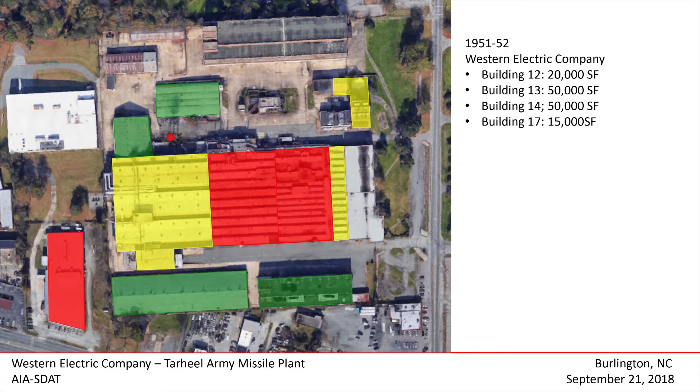And in 1959, they built out yet more. They built another building over here. They built Nike 2, which is the really tallest building on the site here - it's 100,000 square feet by itself, a really, really big building. And that sort of started to build the site out. And then eventually, over time, more of the shots here - here's actually some of the Nike missile gear that was made here.

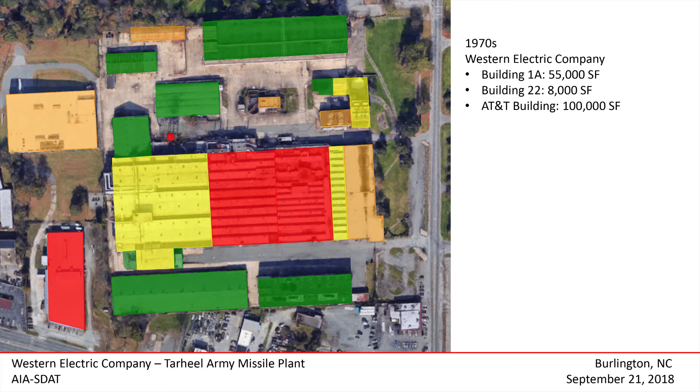By the 1970s, they built some more spaces here. Western Electric started building not just missile parts, but speakerphone pieces, things like that. And in the early 1980s, they built this big block over here.

Here's what we have today. Here's the site, colored out here. But you see, for as much square footage there is, there's lots of open space in between. That's really great to see, because if a factory site is packed too tight, there's not enough breathing room, not enough room to circulate, and not really opportunities to get daylight into the spaces. This is a really nice, modest scale to the site here.

One of the things we were all taken by is when you actually walk into the large plaza areas, the scale still has very much a human scale to it, despite being hundreds of thousands of square feet of space. It doesn't feel too overwhelming. So we think there's a lot of great opportunities to make a really great place to come and visit here.

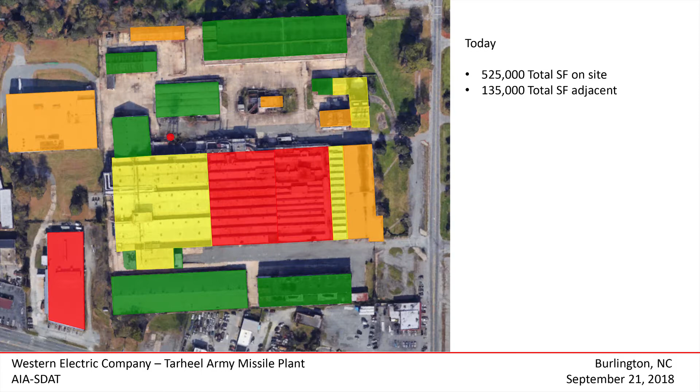So one of the things, this is a sustainable design assessment team. We want to talk about sustainable design. It's one of the core principles about why we're here. However, I'm going to cover this really quickly, because in the end it's something we would do on this project no matter what, but it's not that important to how we're going to redevelop the site.

One of the things to consider to begin with is the recycling of an old building is inherently sustainable, inherently green. Carl Elefante, who's actually the current president of AIA, was quoted years ago as saying the greenest building is one that's already been built. And that's absolutely true.

Both because they're already integrated in the community, but also the idea of avoided impact. It's not just the fact that we've already expended the energy to build the buildings there, but by reclaiming that building once it's been abandoned, you're avoiding the additional environmental impact of building a new building if you can find a new purpose to fit in the old one.

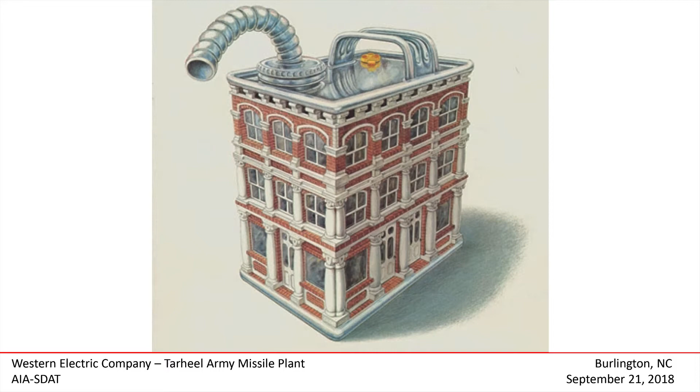We'll do things like solar panels on the roof - it's important and sustainable, done all the time now. We could also do something sassier with a solar canopy in the parking areas, something a little artful there. Let's challenge ourselves to do something really cool with solar and make an art piece out of it - all uses of solar energy, but imagine walking down one of those open areas and having this really cool interactive environment.

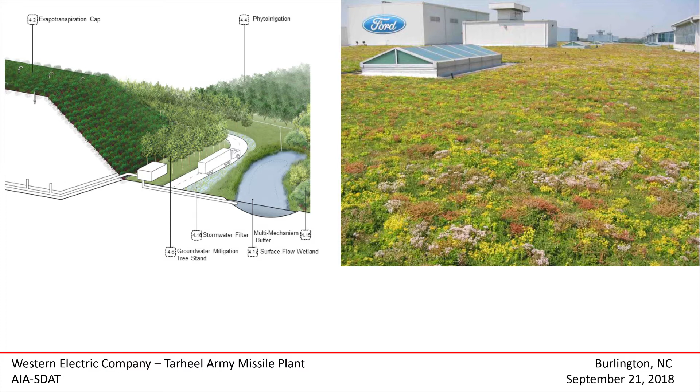Same thing with green roofs - we do them all the time. It's the best way to achieve stormwater compliance, provides some insulative value, and reduces urban heat island effect. The roofs here can support that. In addition, let's talk about phytoremediation - Chris talked a little about that - actually using plantings on the site to help heal the environmental contamination. Let's think a little bigger here than just merely making it greener.

Same thing with water reclamation, a big thing about sustainability. We could put some nice new big shiny galvanized tanks on the site, capture the rainwater, use it to irrigate - a thing you would do no matter what. But on top of that, we've got a really big tank on site anyway, so maybe we could activate the existing water tower, pump water up there and use that to irrigate, providing function back to the pre-existing structure. It's also a great signage opportunity when we renovate the site to have that labeled and branded.

We work hard these days to design new buildings for natural ventilation and daylighting strategies. This is already here. All I have to do is undo all the renovations from the 50s, 60s, the 70s, and open the building back up to be designed to act the way it originally was designed to act.

So getting to the interesting part of it, there's three aspects of sustainability. There's environmental sustainability, reducing the impact of the built environment and our buildings on the natural world. There's economic sustainability, designing in a way that reduces the cost to operate a building so you can afford to operate it. Those are two easily understood things to consider. Social sustainability is the third part that's really important.

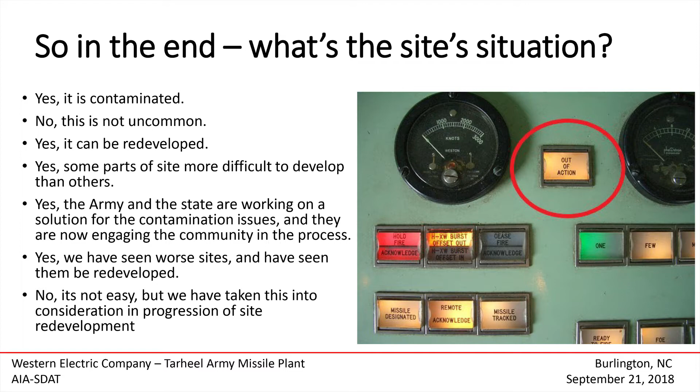The Army and state are working on a solution for the contamination issues. The responsible party for the majority of contamination at the site is the U.S. Army, and they are working with the state remediation program manager to come up with a plan on the ongoing cleanup. When I say ongoing, I'll explain where it has been in the last few years on that topic too.

Certainly, I've seen worse sites than this—you might think, oh what? But no, really, I have. And certainly it's not going to be easy, but we've taken these considerations into account as we've all worked together over the last several days, coming up with a staged plan on how to approach dealing with a big property like this.

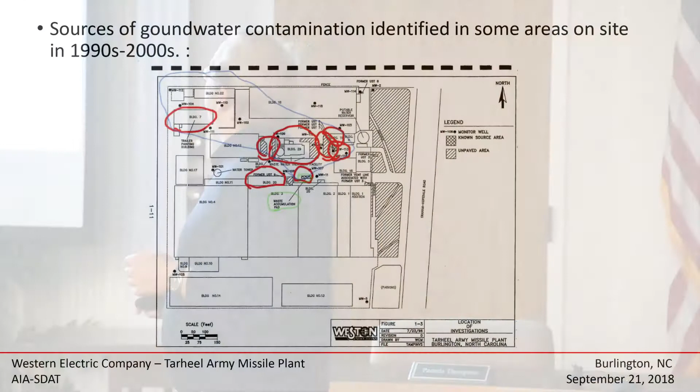Next, briefly, I want to point out from the documentation—and there is quite a bit of it. I was looking through documents for the last few days, and at one point I thought I'd gotten to the bottom of what I needed to download. There's a trove. Then I realized, I looked at Peter and said, Peter, I don't think I'm going to get all these downloaded. He had nice, pretty fast internet set up for us, and I still didn't think I'd get there. So from that point, I picked and chose what I was actually going to try to digest to talk to you guys this evening.

The red areas are the areas of known impact and source areas. The date on the document down there says like '94, but it was updated through—I think this was a 2004 document, somewhere around in there.

But those areas, and you see the blue, that's really bad. Chris is not graphically inclined.

So I tried to draw in there a little bit of where the plume kind of goes to the northwest direction. That is a very basic summary of where the hot spots were. They've done significant cleanup over the years, but there is still a plume in the groundwater going that way. A plume is just contamination that has gotten into the groundwater and moves along.

Can you give us perspective as to what roads are where? Sure, it's kind of hard. Yeah, it's not the best, and it's also kind of squished. The screen squishes it a little bit. So that's north up there.

And as we look at the site, that's kind of the old entrance. So yeah, to the northwest there's a street just north of the property and residential homes on that side, and we'll talk about that in just a second.

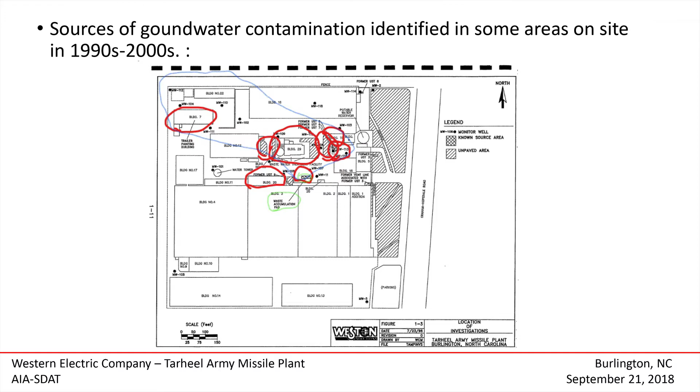So as we go through this trove of information, in 1988 the reports kind of claimed there's no off-site contamination presumed, and no reason to worry about it. The record indicates also a desire to end investigation in the 90s. I presume that means to not prevent redevelopment. They really wanted to see the site redeveloped 20-something, 30 years ago, right?

Interesting, as they'd even added in the record, it shows that people had tried to discourage further environmental review of the site. Where I'm going is they're still working on cleanup now, 30-something years later. Why is that? There were certain forces saying, oh it's good, it's fine, don't worry about it.

Well, in the brownfield world, you have to deal with your issues so you can get to the point of ready finance and being able to do the great things that we want to do. So when you look at that, it even stays in there: somebody, a representative at one time in the 90s was saying, oh, we need to quit doing this environmental investigation. It's like, quote unquote, fighting windmills. Well, if we had fought those windmills, we might have a site redeveloped now.

So just saying. All right, next we move on to the now time, getting closer to now. This was in the 2000s. This is part of the remediation process on site. I found some pictures of the actual remediation taking place, and it shows the three different types.

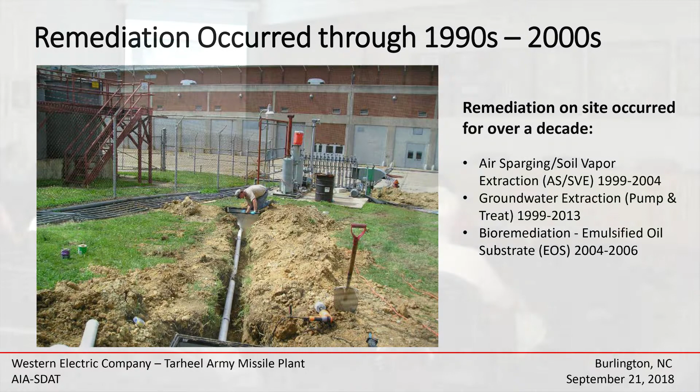One type they even tried in 2004 to 2006 was bioremediation. They were saying, hey, let's try a pilot, let's see if we can do this through the Army. They used emulsified oil, soybean oil, to see how that worked. It didn't quite work out as well as they hoped, but it did work.

It broke down the products, but they broke down into even worse and more carcinogenic daughter products. So then they put more in there to get rid of those. But that process continues to work as it always does. So it didn't quite work out as well, but they tried.

Significant amounts. These groundwater extraction pump and treat efforts went on from '99 to 2013. That's quite a long time. A significant amount was pumped and treated through that.

Next, I'm just going to show you in terms of the site, these lovely panoramic pictures are cool, but sometimes they distort things. You can kind of see the little red box—that's where an old hazardous waste containment area was. So they would store things there, from everything I've read in the record.

I didn't work at the site, so you may know better, and after this conversation if you do, let me know, because we can pass that along. Every bit of information about this stuff helps the future cleanup, trust me. But there were several areas impacted as source areas, which I showed you in red before. That was the big nasty one, and that's the one they focused on as being the source going to the northwest.

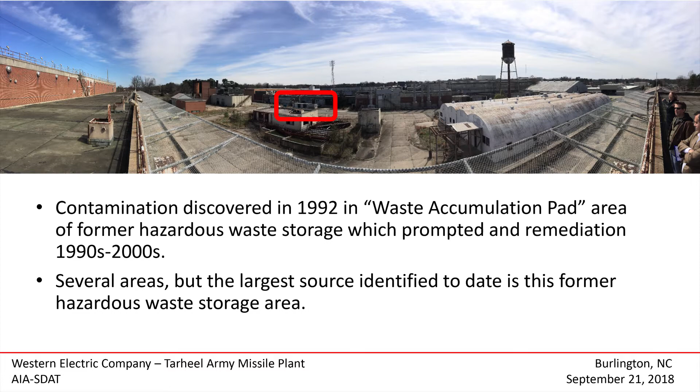Just to provide a little more, these are some snaps. They have sampled in the little creek that runs near the site. They've also sampled on-site—those are some of the locations where they had monitoring wells. So I wanted to just give you a little idea of what was going on.

Most recently, and as the status of now—I want to get to that—in May of 2017, a great acronym, the Agency for Toxic Substances and Disease Registry, the ATSDR, works with the Department of Health and Human Services in North Carolina.

They put together a health consultation, essentially a risk assessment of the impacts at the site and how that may or may not be affecting those off-site. That was based on information in the record, that big giant trove of data. They reviewed it, sent a letter saying we can't say because there's not enough data.

So the Army needs to go get more data. Where I'm going is, if you lived northwest of the site, you may have received a letter recently, in the last month or two, saying they'd like to sample some indoor air vapor intrusion in your house. That is apparently occurring just as I started calling and asking questions to determine the status of the property. This has come to light. So I wanted to run through the status. They are going to seek additional information to find out.

What is vapor intrusion? What is it they're worried about? Essentially, when it goes into the groundwater, volatile organic compounds can travel great distances sometimes, you don't know, and then they can come back up and volatilize into a home. These are typically solvents, volatile organic compounds. The names are big and long, but they're shortened to TCE or PCE. Those are the ones they're concerned with here, and they're generally used as parts cleaner. That's what they used at this site.

I met a gentleman who walked me through the site. It was really valuable information. Great guy, Richard was his name. He showed me the location at the site where they actually used the solvents, and he had personally used them himself, so he was telling me about it. That was a real special treat, to meet him and some others at the meeting the other day.

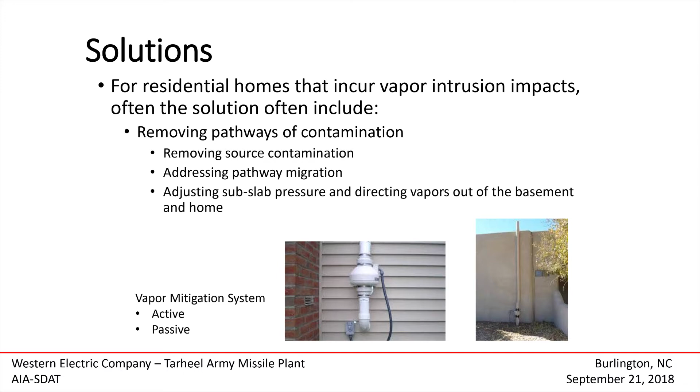If they find those at the houses, is the Army going to pay for them? Typically, yes. I won't speak for the Army, they might shoot me, but in most cases the responsible party does do that, yes. I haven't found one where they didn't.

I just wanted to give a snapshot of what it is. The big key is this concern comes up all the time, all over the country, on brownfield properties I've worked on here and there. It is definitely surmountable, and the data I've seen here is not the type of scary site I've seen in other places.

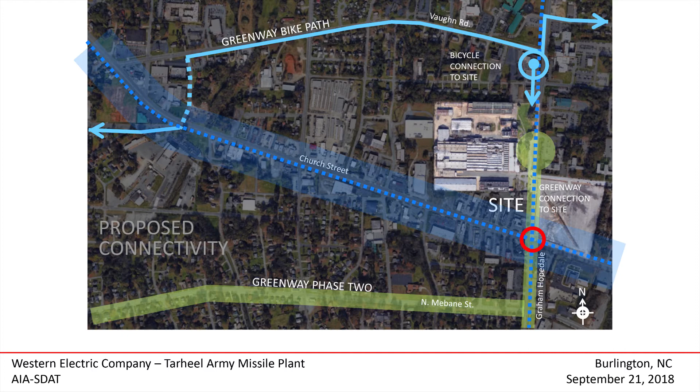And then with some focus soon on the development of the Church Street corridor—a lot of people talked about the corridor really not being the most inviting way to get out to this site. It's all fast food and small businesses. The sidewalks are intermittent and it's really hard to walk. So these connectivity ideas are going to be important in connecting this property to the rest of the community and to downtown, so the other places where you're investing in the community can see some return here also.

So I talked a little bit about this idea of a phased project that happens in pieces. What we wanted to do is say, what's a phase 1 that's doable? How do you keep from being deterred by the idea of 800,000 square feet? Tom has told us many times, you don't need 800,000 square feet of anything, you don't need 750,000 square feet of anything. So how do we look at this complex and start making some really simple decisions that start to utilize the building, utilize the space, change the image of it?

The first thing—the front yard. So we've got this big front yard on this property. It's kind of unkempt right now, but it's a front yard. It's green space.

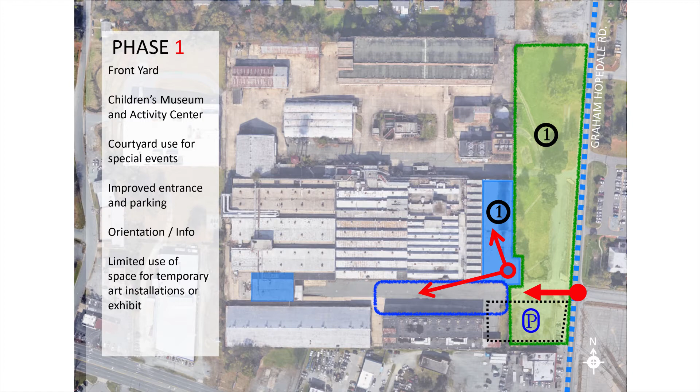Start doing maintenance on it, start keeping that space looking good, and start making it a really positive part of the streetscape in the area. It changes the way people start to think about the potential of the site.

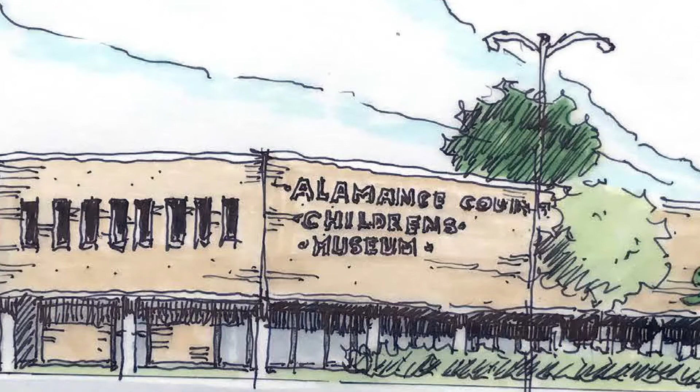Children's Museum and Activity Center. This 1970s piece of building, pretty easy renovation. None of these are set in stone, you could put a medical office there. There are any number of things that fit the needs we've talked about that could go in this location.

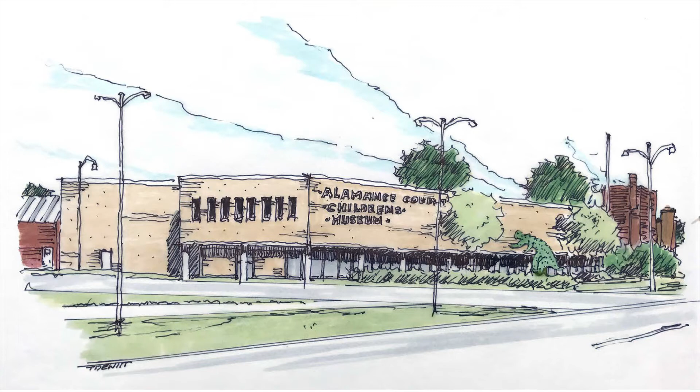But to start bringing activity to the site, bringing families, a place to start going and having those activities. This courtyard where we met the other day could very easily be cleaned up and turned into an event space that can be managed and controlled when you need to, with small concerts or a big movie screen for outdoor movies in the summertime.

By reworking the existing parking and the entry here, you really can create good access to this. You've controlled a portion of the site, and you haven't had to deal with all of the mess that's behind it right away. So you can really get started with this.

When you go down Graham Hopedale Road and look at this property, it can look like a fully renovated and restored property pretty quickly by doing some of these first steps. So phase 2, this image shows the prominence of that front building. As a children's museum, as a new clinic, it starts to really project the potential of development here.

Phase 2 extends that idea with the development of a health and wellness clinic area. We're not programming this right now, but as a focus for development, it's an opportunity to partner with other healthcare entities in the region and the community to help make this project happen.

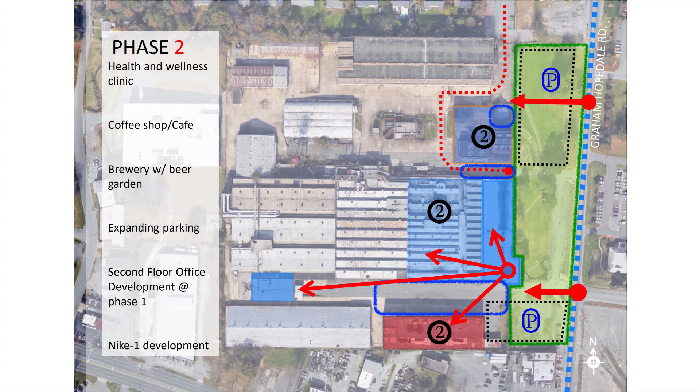Over here, I have to say this is a little bit of a favorite - I do own a brewery also, and brew beer. So we've got this cool building sitting over there that's also part of the front of the property, the old boiler plant, or the power plant.

There are plenty of examples of where those have been turned into breweries, brew houses, and really cool places to go eat and drink. We've got an opportunity here too to create some parking with public access. And we now have the whole front of the facility, for the most part, cleaned up and occupied and being used.

Now, the red rectangle down here, that's the Nike missile plant number 1 - not missile plant, Nike number 1. Nike number 1 is a pretty good building from a development standpoint, and in a few minutes Dominic's going to talk a little bit about some development scenarios for that building.

It can easily be a standalone development, so it could happen at this time, number 2. And a couple other things there - there's this little building back here, a portion of building at the end of this courtyard.

When everybody took the tour the other day, everybody that walked in there said, wouldn't this be a cool restaurant? It's got a little wall space in there called the Crow's Nest. Well, that could be used right now as a temporary exhibit space - you could do rotating exhibits, receptions in there. It's a small area that's easy to clean up, tidy up, and separate from the rest of the facility, and it's connected to this courtyard where you could do events also.

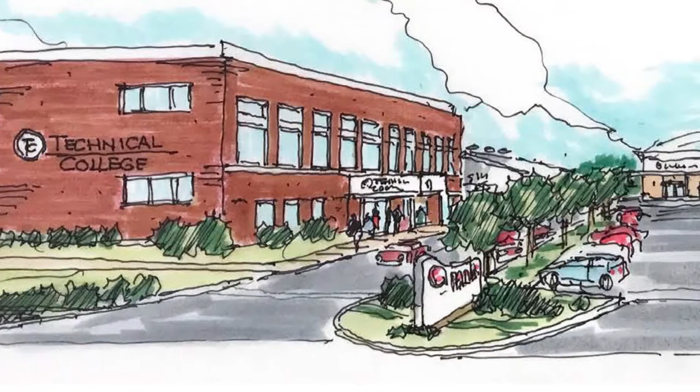So the next phase, phase 3 - well, this is in phase 2, you can see just by cleaning up that courtyard, the entranceway, and the parking, you start to have a pretty inviting space and building here. And again, there's really big challenges we haven't had to deal with yet. So we're moving you through step by step in a way that you can grasp how to turn this whole facility around, but not all at once.

That's the power plant there, so, pretty cool brewery space if you ask me. I'd love to have mine there, but I already have one.

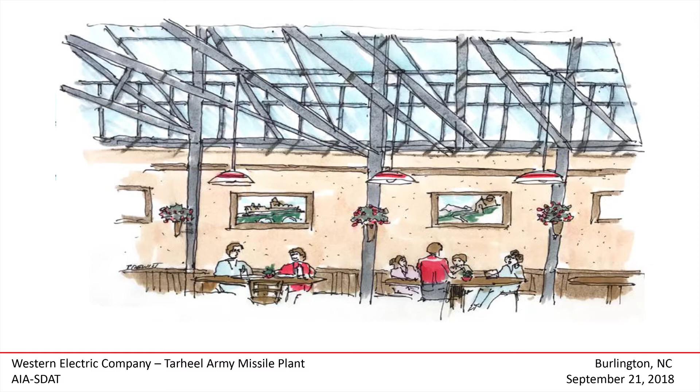Expansion, expansion, yes, we're not franchising.

Phase 3 is where we start to take on some of the big buildings, and we need more infrastructure on site, more circulation, more parking, all those things that go along with increased development and increased occupation, so we've got a lot of people on site.

So the expansion of the health and wellness can include recreation facilities, whether it's indoor soccer fields, tennis courts.

I don't know if you're into pickleball down here. It seems to be what people are talking about back home.

But facilities that can be regional draws as well as local and community assets from a recreational standpoint.

The building here, which is a corrugated metal building that some of you saw the other night, is the perfect size to be indoor parking. You just open it up, drive two drive aisles inside, and you've got parking right there - you didn't have to build a structure.

And that parking can serve this new development and this new development here, while your parking out here is still serving your development along the face of the property here.

We're also looking here at starting to think about having a connection through this building that connects these two open areas that we're calling plazas right now, so down the road we're starting to create a way for you to move around this property and for different areas to be connected internally.

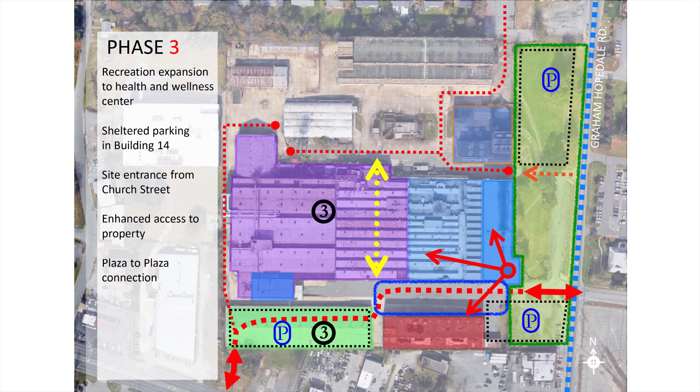There's also an opportunity down here, because we have a piece of property that isn't built, to have a connection directly off of Church Street too. So we're increasing access and varying the access to the property so different functions in different areas don't overlap and have traffic problems on the site.

And you can see these spaces inside these buildings are huge. You can easily fit multiple recreational fields inside these buildings.

So now Phase 4. Phase 4 is really concentrated back in the back of the property. They're these smaller open buildings, the Quonset hut building right here, a little courtyard here, and these kind of open spaces around them. We see Phase 4 really being sort of artist maker space.

It's an area that might need more cleaning up and more remediation in that portion of the site, so we pushed it back in the phasing a little bit to give us time to get there and do the things we need to clear the way so development of those is easy.

This could be a public sort of sculpture court where the artists that have their studios here have their stuff out there. It's open to the public. You can go see what they're working on and watch their process.

So that's Phase 4. Public gallery space could be in the Quonset hut. And at this point, we can start thinking about this large open space over here too, as a large event space. And that's a big space.

You could have a big concert there and put hundreds of people in there. You could have small stage, big stage. It's really pretty flexible right now.

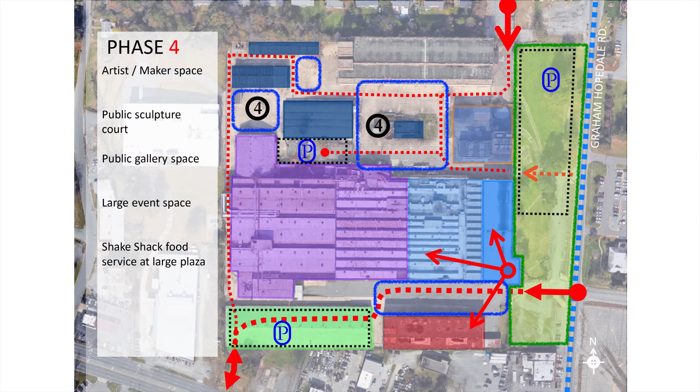And you can see it's got a nice scale to it. This would be your brewery down here on the end, and you'd have a beer garden off of the brewery, and you could walk back out - if an event was going on and you couldn't get into the brewery, just come on back out and get something out here in the plaza.

It's a really kind of wonderful space for that, and these big sort of odd Cold War buildings are a really cool backdrop that give it character that most places don't have.

So Phase 5 then is really the biggest undertaking from a development standpoint, and it's the big Nike 2 building back here. That building can sit there. It's not going anywhere, nothing much is going to happen to it. So if you need 20 years to do the rest of this stuff, it's just going to be waiting for you right there. For development, it's a lot of square footage.

It can be broken up all sorts of different ways. And so, in a way, we don't want to prescribe that it has to be anything right now, because once you get to it, you may have a different idea than you do now about what you'd like to have there. This site might become a destination, and all of a sudden that's really something people are looking at and saying, well, I really want to do that. We've got a university that wants to put a portion of their school there. We've got a lab that wants to go there. So we're not prescribing right now every use for every building. We're giving you some suggestions on how this could work and how you could move this forward.

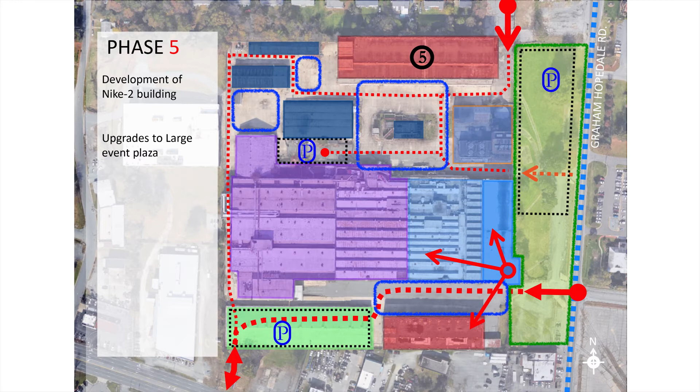You can see really these are the Quonset huts. Everybody loves the Quonset huts. They're there, and you have all these extensions to the plaza all around the Quonset hut. You'd be wandering around the artist studios if there was an event there. So you've really got a wonderful place to be, interacting with a wide range of things.

So we also wanted to take a big picture look here. We've heard some people talk about a range of things. And so, if we just thought of this as part of the Greenway now and really connected green space to a place where we create a new anchor here at this intersection at Church, that can really be a catalyst for starting to redevelop the neighborhood and improve the assets available in this neighborhood, thinking of this as a sort of center, Burlington Center East or something, however you want to think about that. But you start to brand it, you start to get green space in the facility.

See your little sculpture garden here, more greenery, garden space. You could have native grass gardens in this open space, following the old railway tracks. There's so many ways to think about how you could take each of these spaces now and turn them into amenities for a much larger, more complex facility.

There was talk of needing a transit center in this part of town, and so you've got a property right here. It's got some extra parking on it that could be overflow from the big facility here. And this transit center could be connected to your greenway and bike path.

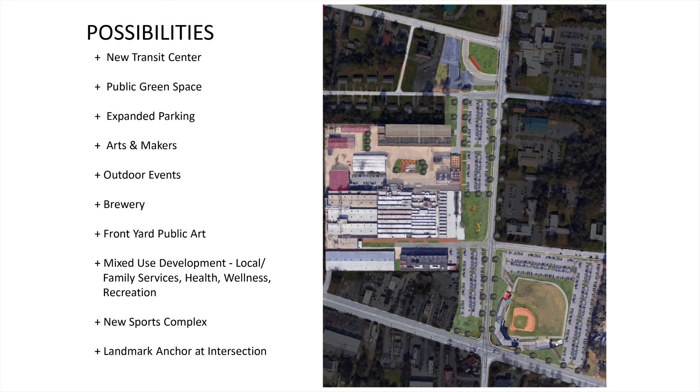And then for kicks, we just threw your baseball field in down here. So let's say you built a new stadium, this could be a soccer field. We're not trying to push baseball on you or anything, but what you get is the parking that's really kind of required for all of this, about 400 parking spaces there. It's a perfect site for a really substantial facility that becomes a draw, a regional draw and certainly a local draw. It's connected very easily then with your transportation plans, with your greenway plan, and with your bike plan up above, right to the entrance of our site right here.

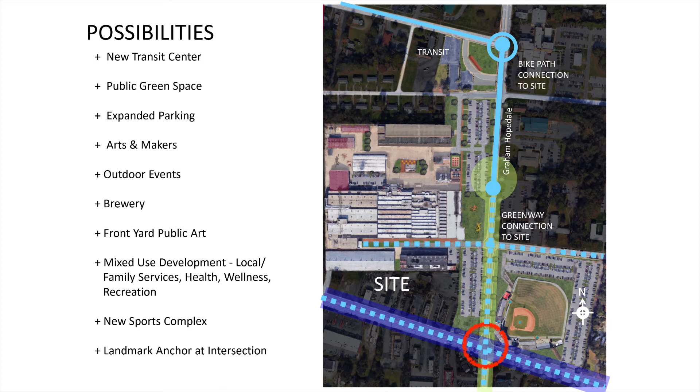So we really feel like there's some positive ways to move forward with this project, without being daunted by the size and scale. You just have to look at it a little bit differently. Now I'm going to turn it over to Dominic, and he's going to talk about development and numbers, and make it exciting.

What I was going to do here is just focus on a few that I thought would be good candidates. By no means are these the only ones. What we were looking to do was start to create a little bit of bones to some of the early phases we were presented, and start to see there's a path forward. We looked at the environmental, there's a path forward there, there's a path forward on the finances as well. Won't be easy, but it'll be there.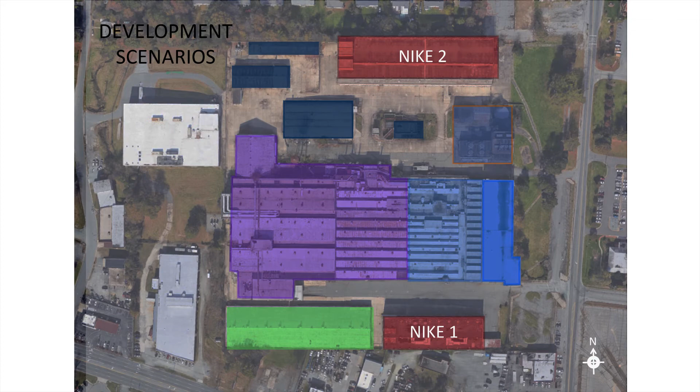The next scenario I'll show you looks at a larger health and wellness piece throughout here. So let me walk you through it to make a little more sense, and we can get into it more.

This was really when I walked through Nike One—building 14 or something like that—it struck me as an easy place to start. Good bones, great light. As Tom mentioned earlier, you've got these—I take terrible pictures compared to these guys—but tons of opportunity to just open up the whole space. You've got these windows up at top, so it's a great contributing historic building.

So I looked at it—50,000 feet—and did a little research on your local construction numbers.

I then went down and said, okay, if I could get a loan for about 3/4 of it, I'd have to come up with about another $2 million bucks. Where would that money come from? Start looking at the historic credit, the state credit. The historic credit for these pieces, I assumed we would go sell them. For the state credit, I assumed the developer would use them.

Market for the state credits is not as broad as the federal, so that's why I assumed that. Basically, for the developer, he's creating about $1 million worth of equity between getting a state credit and putting additional cash into it. Went through it, figured a rent, projecting out about 4 or 5 years, figured about 11.5 bucks a foot, which again passed that smell test.

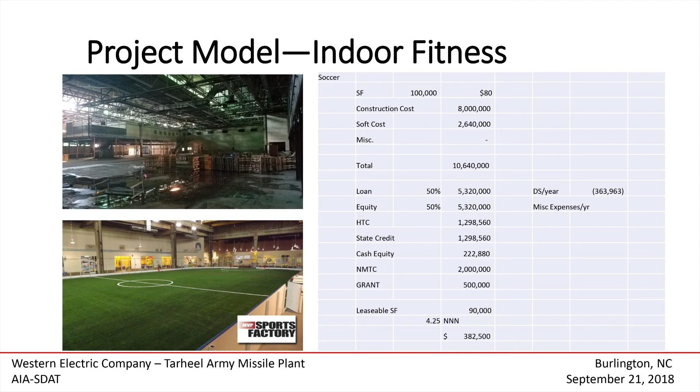I think so, maybe, if we've talked about getting three fields plus other facilities in here. But you can see my approach was a little bit different—I tried to get less leverage on the loan, so we pushed the loan down. What that has the ability to do is make it easier; the guy has lower monthly payments on the back end, so I don't have to achieve as much.

And then, started to create—okay, new market tax credits, I should have mentioned this earlier, really only apply for non-residential projects, so this could be a job generator. They like that. So maybe I can get new markets and a grant of about $2.5 million bucks. That kind of gets me to something where, if I can find an operator who gets me there, I'm the developer, and I'm able to say, okay, I've got this great activity generator, it's bringing other people and traffic, and I'm not so worried about my return.

Tougher than the first one for sure. But again, it was just that we wanted to go out there and test some of these assumptions—that's kind of the approach we looked at.

So, climbing walls, ball fields, you could have event space in here. It's a multi-purpose space, and there's a lot of possibilities with such a wide column grid. But again, we're going to have to deal with environmental issues, and that also lends itself to not wanting to be residential, which is something we really steered away from, particularly for this phase.